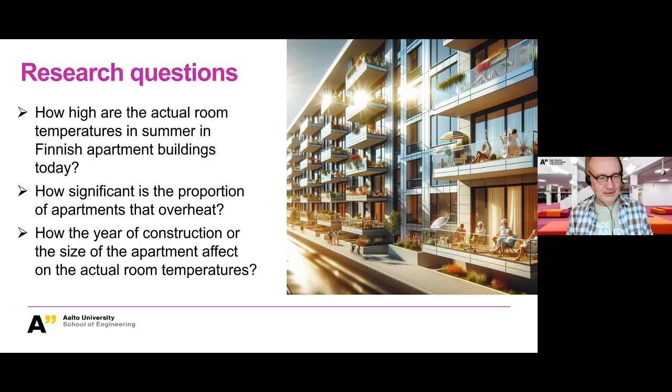This presentation focuses on three research questions. First, how high are the actual room temperatures in summer in Finnish apartment buildings? Second, how significant is the proportion of apartments that overheat? And third, how does the year of construction or the size of the apartment affect the actual room temperatures?

We have 4 climate zones in Finland, and this study focuses on the Helsinki region, which is located in climate zone 1. Here we can see all 4 climate zones, and now we are focusing on southern Finland. This map shows the average number of hot days during a 30 year period. In Finland, we define a hot day as a day on which the daily temperature exceeds 25 degrees. This map indicates that the average risk of overheating in buildings is highest in the studied climate zone 1.

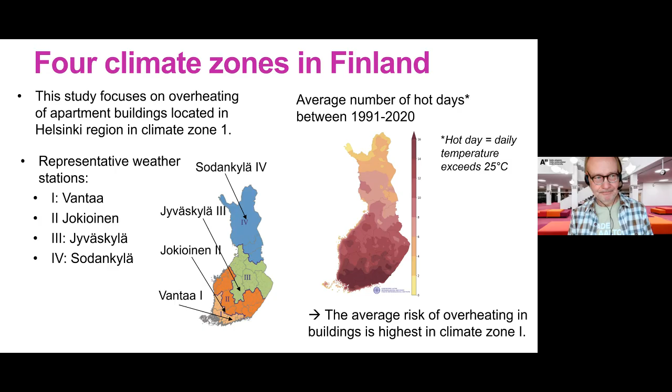As we all know, summers are getting warmer and long heat waves are becoming more common. This figure shows degree hours above 20 and 25 degrees during a 35 year period in the studied climate zone. We can clearly see there is an increasing trend in the degree hours, so summers have really become warmer.

In addition, long heat waves have become more common. Here we can see the top 5 list of longest heat waves in climate zone 1, and 4 of them have occurred during the last 15 years. In this presentation, I use the definition for a heat wave as a period of consecutive hot days.

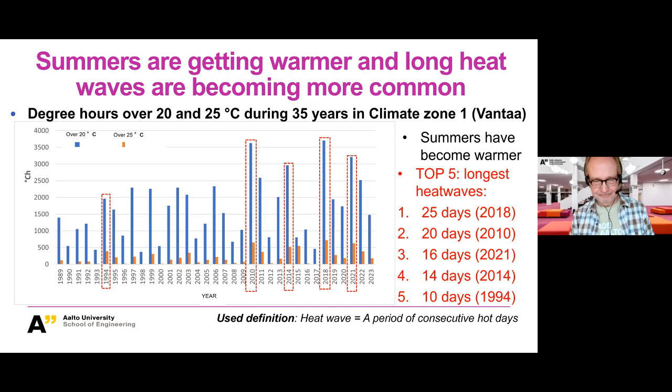We got access to extensive indoor temperature measurement data for apartment buildings, containing hourly indoor temperatures for several summers. In this presentation I used 2 summers: 2020, classified as a normal summer, with 16 hot days in total, and 2021, classified as a hot summer, with 30 hot days in total. It was third in the top 5 list we looked at before, with a 16 day long heat wave.

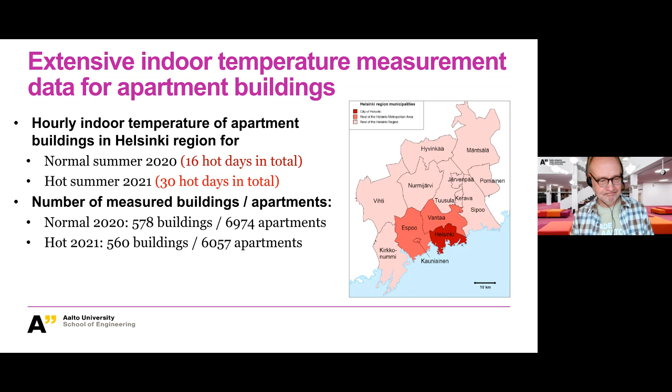This data contained over 500 buildings per summer and over 6,000 apartments. The construction year of the buildings and the floor area varied a lot in this data set.

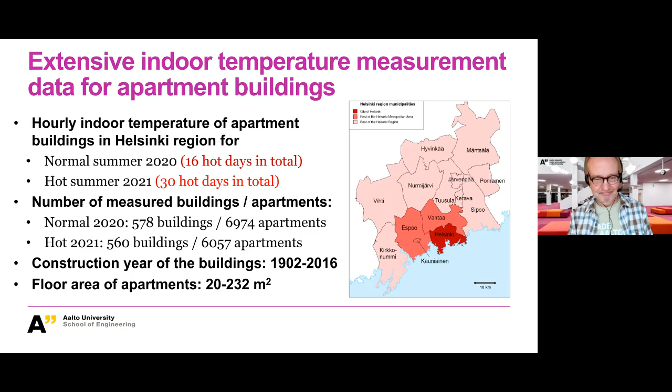The indoor temperature measurements were carried out in a way that one IoT sensor was installed in an entrance hall of each apartment, meaning the measured temperature describes the average temperature of the apartment. This also means there can be higher room temperatures in parts of the studied apartments, but we use the average temperature here.

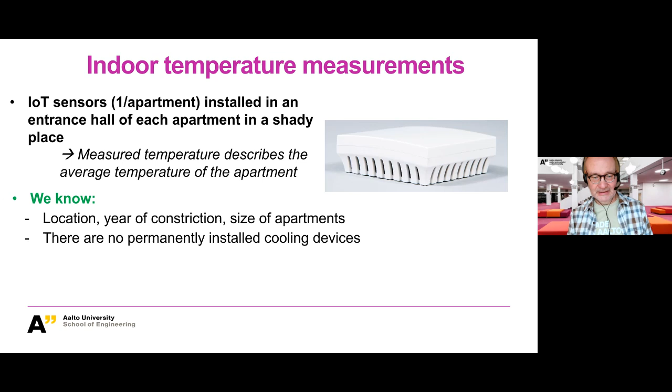About the dataset: we knew the location, year of construction, and size of the apartments, and there were no permanently installed cooling devices. But there were many things we didn't know, for example orientation, window areas, number of occupants, how occupants behave such as whether they open windows or not, and whether there are portable cooling devices.

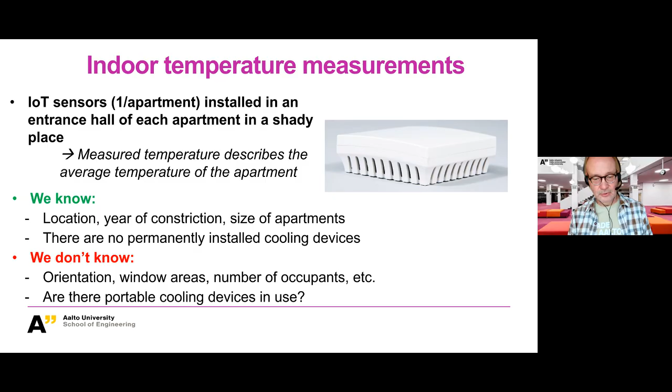We carried out grouping of the apartments by design year, classifying them into 5 design year groups. The first group was designed before the time of the Finnish building code, and in that group the ventilation system is either natural ventilation or mechanical exhaust.

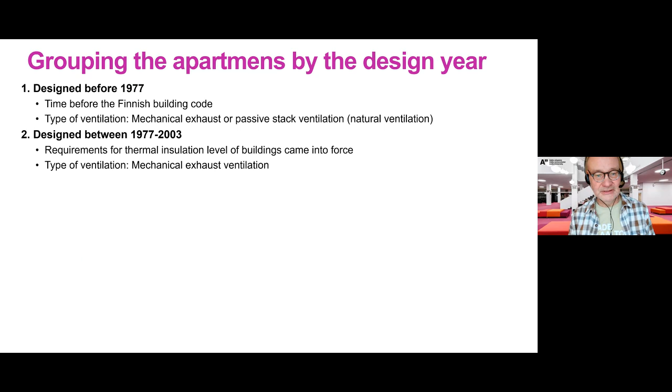In the second design group, there were requirements for the thermal insulation level of buildings in force, and in those buildings there is mechanical exhaust ventilation in use.

In the third group, there were tighter requirements for the U values of windows, meaning the use of low emissivity windows became a standard solution, so the solar shading of these windows was better than before. Also, requirements for ventilation heat recovery came into force, so the ventilation type was mechanical balanced ventilation with heat recovery.

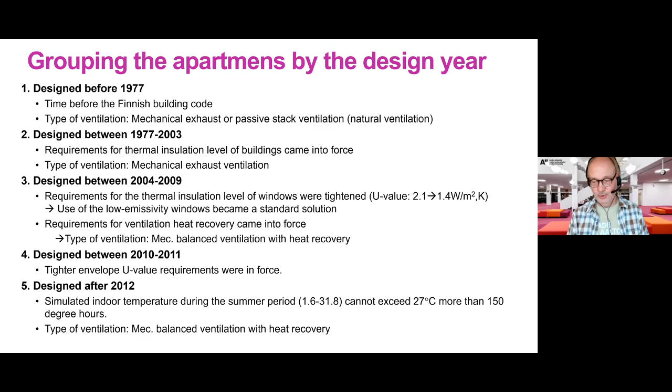In the fourth group, there were tighter U value requirements in force. In the fifth group, designed after 2012, there was a requirement for summertime indoor temperature at the design phase, stating that the simulated indoor temperature during the summer period cannot exceed 27 degrees for more than 150 degree hours.

Here we can see the number of apartments we analyzed by design year and size, after pre-processing and cleaning the data set. We can see that the most common design year groups are the first and second ones, and 2- and 3-room apartments are the most common in the dataset as well.

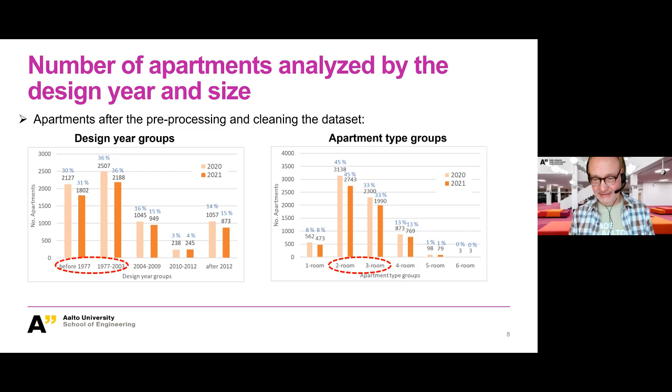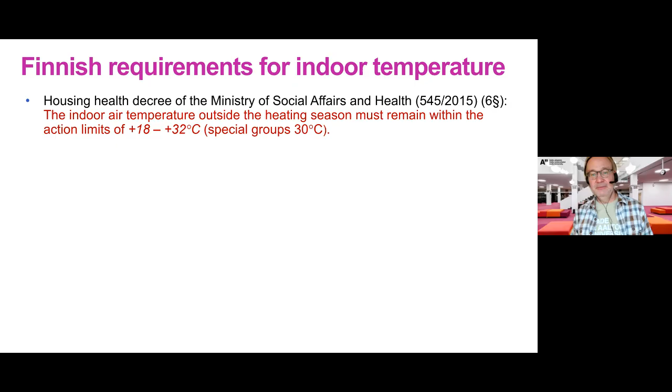Let's check briefly the Finnish requirements for indoor temperature. First, we have the housing health decree, which states that the indoor temperature outside the heating season can be a maximum of 32 degrees, defined as the maximum action limit. For special groups, this maximum action limit is 30 degrees, and special groups include, for example, elderly people in home care.

Then we have two decrees from the Ministry of Environment. The first states that the maximum design temperature of room temperature outside the heating season is 27 degrees. The second is the decree I mentioned before, which applies to buildings in the design phase and during the building permission process, before getting the building permission.

The simulated indoor temperature should fulfill the requirement that it should not exceed 27 degrees in the apartment building for more than 150 degree hours during summer months, simulated with fixed input data and the test reference year.

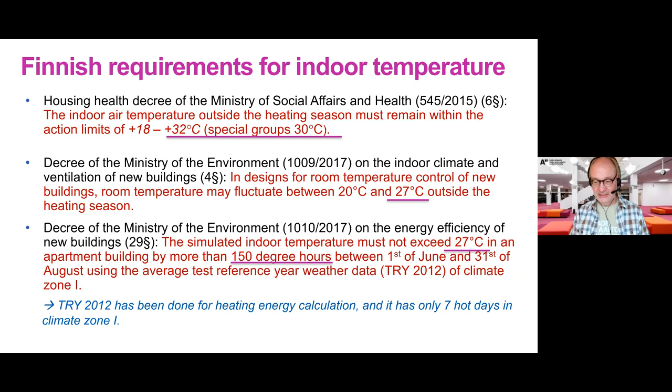This test reference year was developed for heating energy calculations and describes average weather conditions. It's not that suitable for this kind of overheating simulation because it has only 7 hot days in climate zone 1.

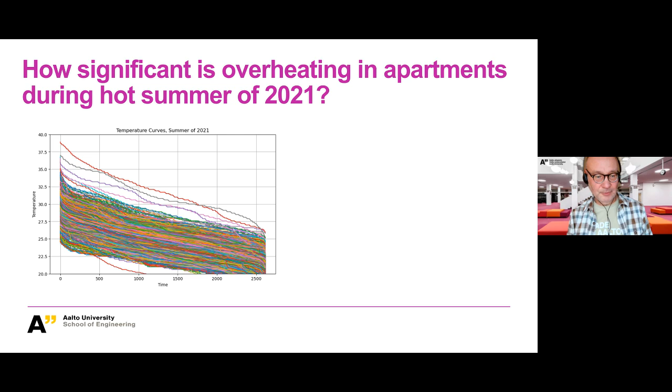Okay, then let's go to the results. Here we have a duration curve of indoor temperatures of all measured apartments during the hot summer of 2021, and we can see that the range of temperatures is really high.

From the action limit point of view in the housing health decree, we can see that the higher action limit of 32 degrees is exceeded in 4% of the apartments, and the lower action limit in 32% of the apartments. The design criteria of 27 degrees is exceeded in almost all the apartments.

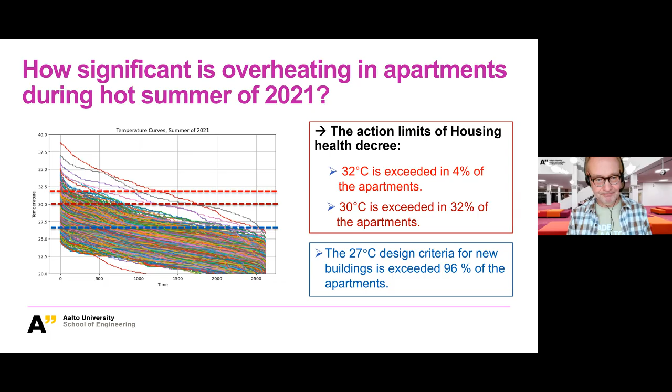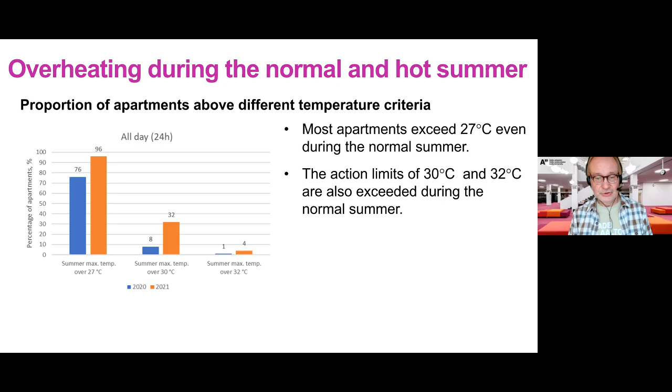Then how different is the overheating during the normal and hot summer? Here we can see the proportion of apartments above these chosen temperature criteria. Most apartments exceed 27 degrees even during the normal summer, and both action limits are also exceeded during the same normal summer.

If we apply these results to the whole apartment building stock of the Helsinki area, over 500,000 apartments, assuming they behave similarly to the measured apartments, then the higher action limit would be exceeded in almost 6,000 apartments in the normal summer and over 20,000 apartments in the hot summer. So even if the percentage of 1% and 4% sounds quite low, the number of apartments would be quite significant.

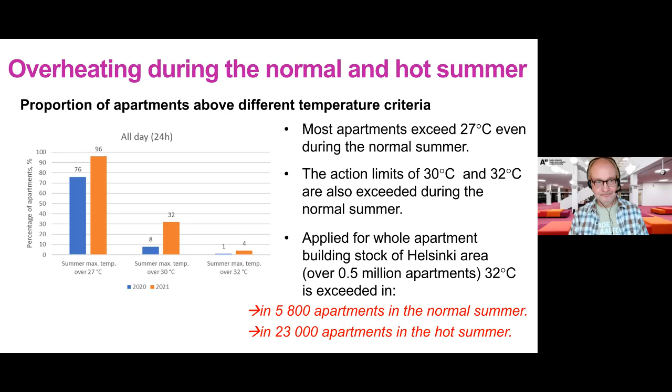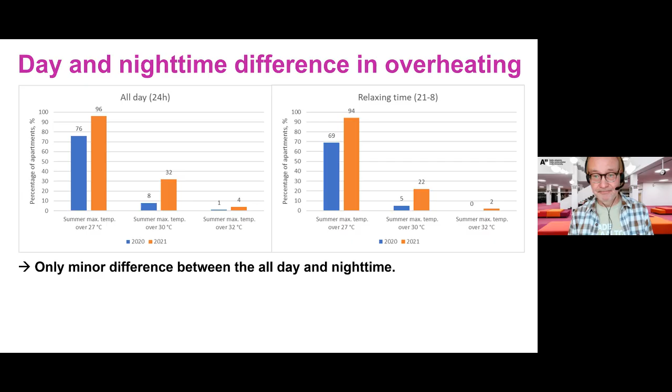Here we can see the day and night time difference in overheating, for all-day and relaxing time. These figures show that there is only a minor difference between all-day and night time. The load-bearing structures of these measured apartment buildings are brick or concrete, and if such apartment buildings warm up, they will stay warm even at night.

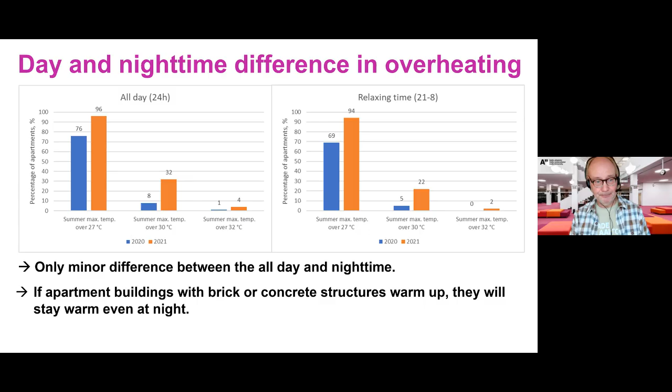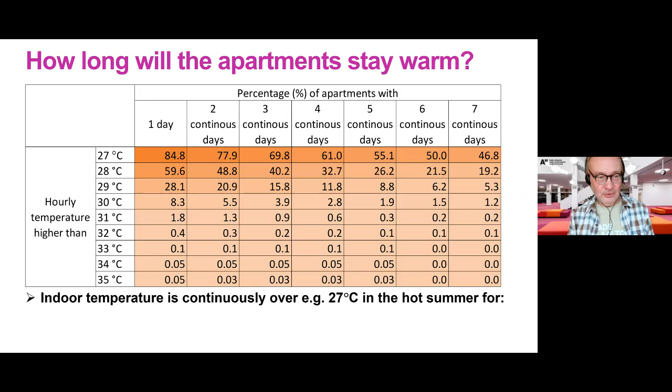Then how long will the apartments stay warm? This table shows the percentage of apartments which are continuously, from 1 to 7 days, over temperatures from 27 to 35 degrees. For example, if we look at 27 degrees, the result indicates that 85% of the apartments are continuously over 27 degrees for 1 day, or 47% of the apartments for 7 days.

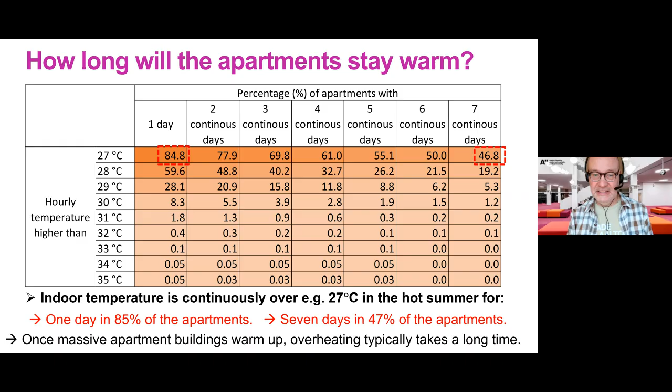This indicates that once the massive apartment buildings warm up, overheating takes a long time. We have also seen from the data that even if the heat wave is over, overheating continues for a long time afterward in such buildings.

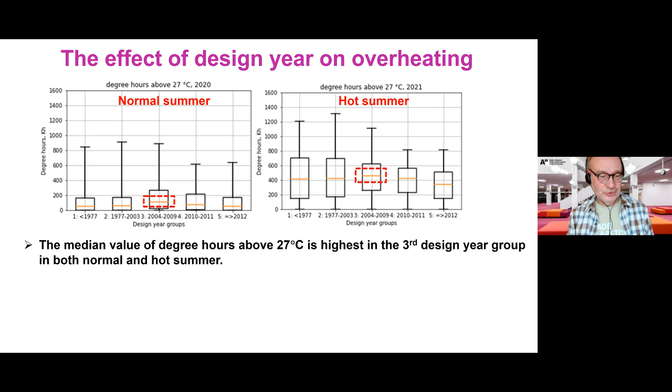Here we can see the effect of design year on overheating in the normal and hot summer. The result shows that the median value of degree hours above 27 degrees is highest in the third design year group in both summers.

This is quite an interesting result, because in those buildings the windows are better than before, and they have better solar shading than in the design year groups before them. But also ventilation heat recovery requirement came into force, so that may have a negative effect, for example if the ventilation heat recovery is not accidentally bypassed during the summer period. We don't know that, but it could happen.

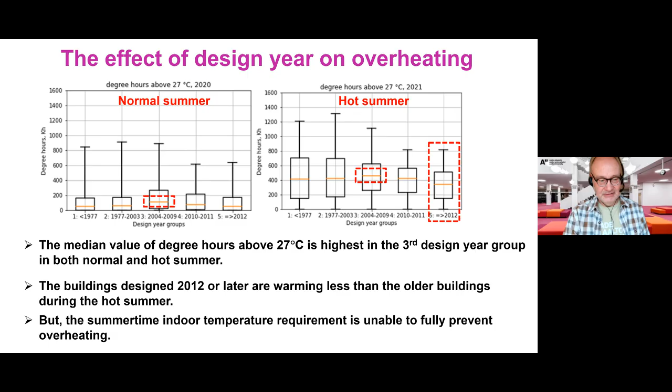Also, the result shows that the fifth design year group is warming less than the other buildings during the hot summer. So it indicates that this requirement of summertime indoor temperature is unable to fully prevent overheating, but it has a positive effect, so it reduces it slightly.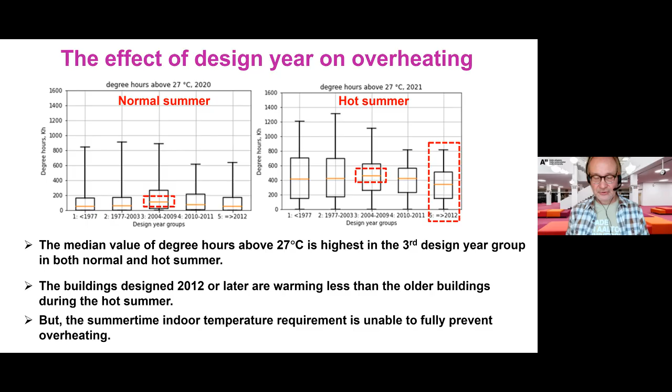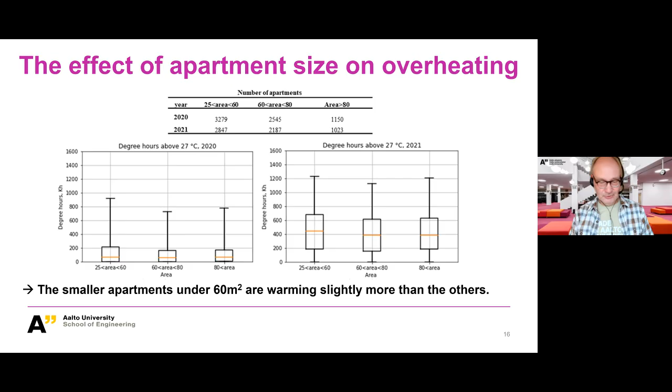Here we can see the effect of apartment size on overheating, with degree hours above 27 degrees in both summers. The floor areas are classified into 3 groups, and the results show that the smaller apartments are warming slightly more than the others. This is quite an expected result.

So this study showed that Finnish apartment buildings overheat significantly during the hot summer, but they also overheat during a normal summer. And once massive apartment buildings warm up, overheating typically takes a long time, with minor difference between day and night time.

The summertime indoor temperature requirements have succeeded in reducing overheating, but not yet enough. This means that stricter regulations are needed to prevent overheating in new buildings, and - which is more challenging - more attention should be paid to preventing overheating in existing buildings.

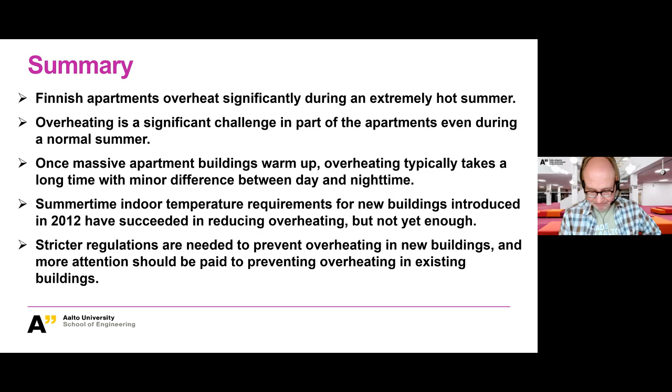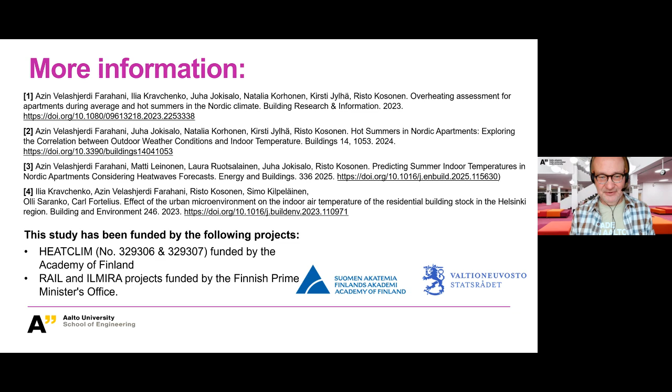If you are interested, there is more information in a couple of our papers, so details can be found there. Thank you very much.

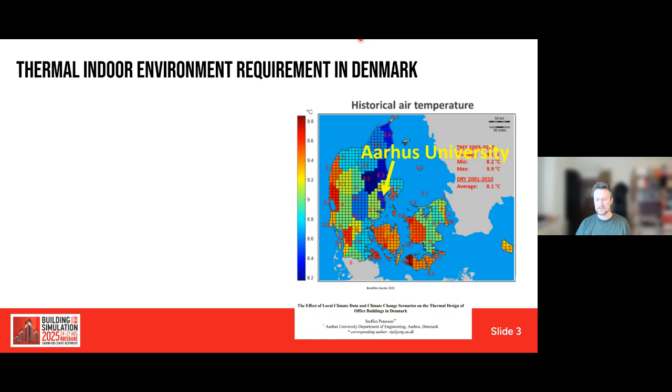But anyways, this is a talk about what's going on in Denmark when it comes to overheating of existing buildings, and the way that we design new buildings today. Because the thing is that we are designing buildings for the future, but we are designing them based on past weather. The way the code is in Denmark is that we have a requirement that says that in rooms where people stay for a longer period of time, it must be ensured that a thermal indoor climate that is satisfactory in terms of health and comfort can be maintained during the intended use and activity. And that is the paragraph.

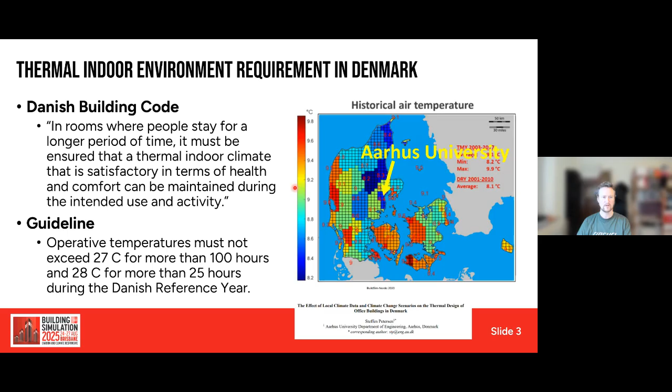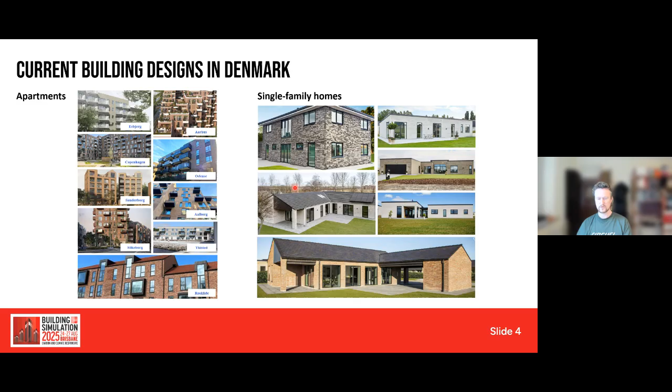The question is, in this talk and in this paper that we made for this conference, would these buildings also fulfill the code moving forward when we are projecting weather data into the future using different climate change scenarios? We're not completely sure what is going to happen, so we have to do scenarios.

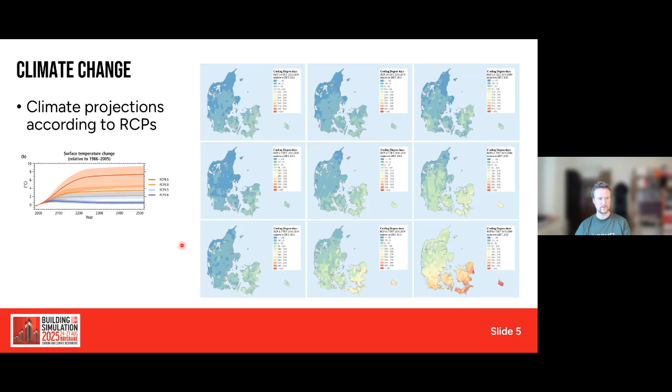So our question here was, are Danish dwellings built today resilient to the risk of overheating, assuming different climate change scenarios? The method that we used for this was to make some parametric models of a living room in a dwelling, and then use an algorithm to generate a lot of variations for these building designs. And then we developed this tool that we call ICEbear, a parametric, easy to use thermal calculation tool.

And then we simulate the performance of these 11,086 variations using sampling from this table you can see over here to the right. So we get different geometries, different combinations of heat capacity and heat conductivity, and so on. And then after that, we evaluated how many of these would pass this criteria of overheating I showed you earlier, with 100 hours above 27 and so on. And a total of 4,115 passed that.

And we could then condense that to 321 models that kind of represent the whole sample of these 4,115. So we get these designs that fulfill the criteria today using the weather data file that the building requirement says that we have to use.

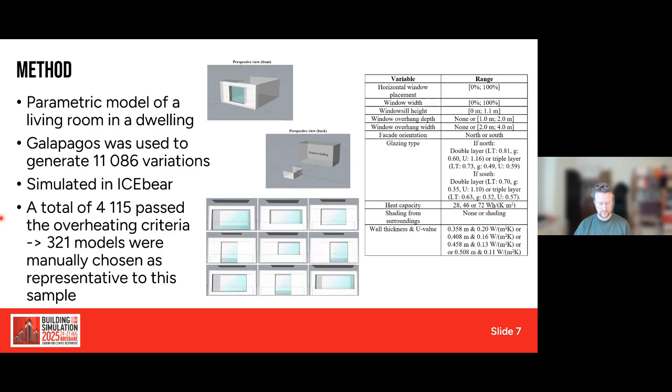Now the interesting thing would be to see if these buildings would still fulfill this overheating requirement when we use climate change scenarios. So we take these 321 models and put them into the 3 RCP scenarios I showed you earlier, and we do it for the different periods ahead in time. The question now becomes: how many of these models that are allowed to be built today, because they are not overheated according to the Danish building code, would still pass in the future?

Would they pass the guideline for overheating using other weather data?

For this purpose, we also chose a few geographically spread locations in Denmark. You can see this on this cooling degree map, Aarhus, where I am right now. We have the 5 largest cities in Denmark, which for some interesting reason are also situated in different degrees of increase of cooling degree days. So we have a geographical spread, and these cities are also the largest ones, so this is where it might impact the most people. We are simulating them for these different locations in Denmark to see if there's some spatial distribution of the problem.

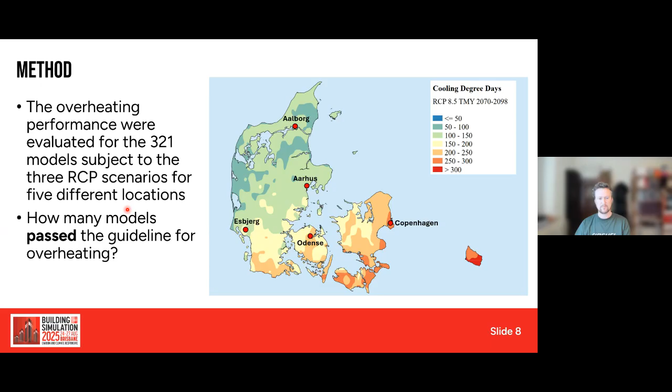So here are the overall results. I'm sorry, it's a lot of data in a table, so I'll block some of it out to make the development easier to understand. We have the different cities here, and we have the RCP scenarios. I'm just highlighting the 8.5 so we can see the development over time. These are the periods ahead in time.

You can see this, for example, for Copenhagen. If we look ahead in time, only 249 of the 321 designs fulfill the building code requirement looking into a near future. Looking further ahead in time, none of them will fulfill the code. They will be overheated according to the code.

If we go to a different location, Aarhus, where I am, looking a little bit ahead in time, all the designs will fulfill the code, and then in the future, some of them, but in the far future, none of them, and so on. You can see the development is slightly different across a small country like Denmark, where depending on how far we look ahead in time, these designs will not fulfill the requirement in the current building code.

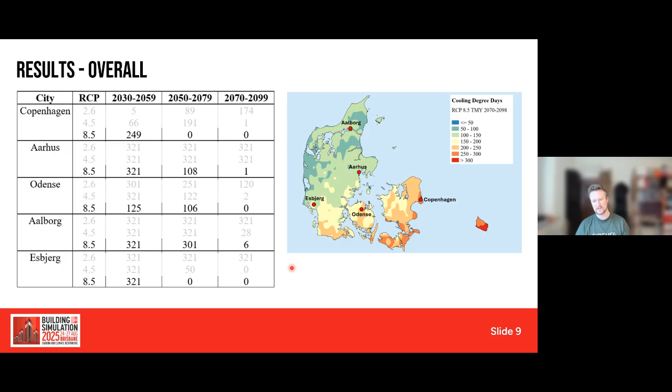So what can we do about that? What is actually important now to think about when we design our buildings moving forward? So we looked into the features of these simulations to look at those that are fulfilling the requirement. What are the traits? What are the design features of those?

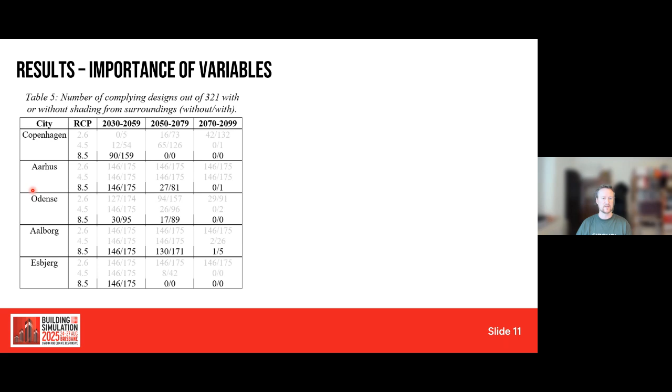Do you have, are you in an urban context or not, basically? Looking into this, it seems like if you have some shading from the surroundings on your buildings, they have a stronger resilience towards the overheating potential. Again, because the sun is also governing a lot of the indoor temperature in dwellings in Denmark and in the Nordic in general, I would say, we shouldn't underestimate the sun in this case as well. It's not only outdoor temperature.

Yes, orientation north-south. Again, there's a little bit of an interesting thing here depending on the location. Of course it's better to have it towards north, but it's still possible to have south as well, unless, of course, we look far into the future, then something else might happen.

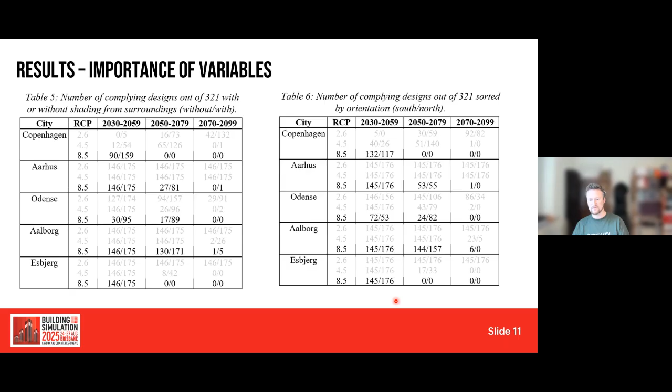Let me check: 2 or 3 layer glazing. That's always a discussion in Denmark—should we have 2 or 3 layer glazing in our buildings? It's a trade-off between heat loss and heat gains. The 3 layer glazings reduce heat loss, but they also reduce heat gains because of the G value, and it's vice versa with the 2 layer glazings. So what's the nice balance in a Danish context?

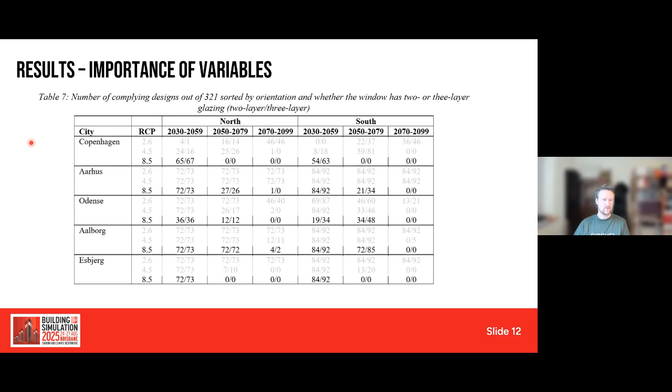Looking at 2 layer versus 3 layer glazing, depending on whether it's facing north or south, we can see some statistics showing that it depends—it's not clear whether it should be 3 layer or 2 layer. It very much depends, which is interesting, and opens up further investigation into what would be the appropriate design choice for glazings when we also take daylight into consideration.

But there are some options, some ways that could help in terms of thinking about how we avoid overheating in our buildings for the future.

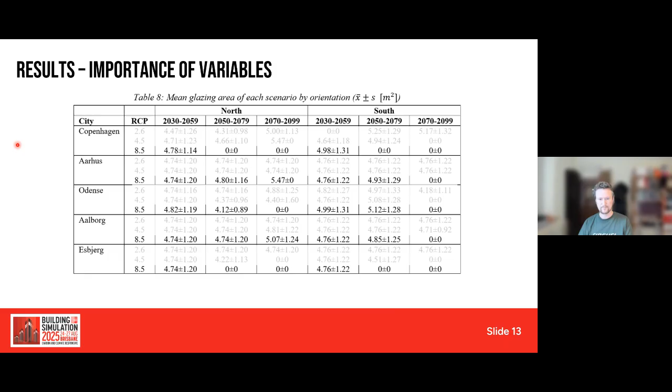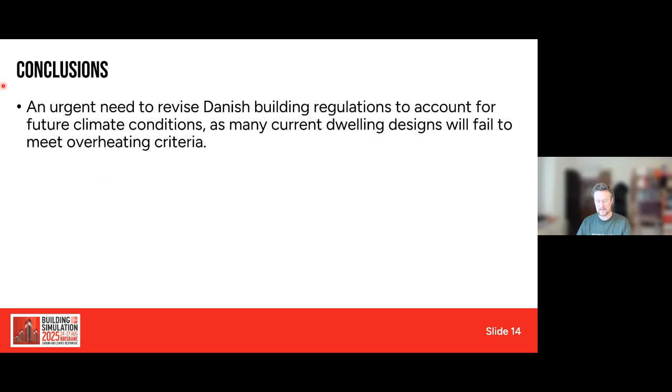Our conclusion from this study is that there's an urgent need to revise the Danish building code regulations to account for future climate conditions, as many current dwellings designed will fail to meet overheating criteria in the future. That's definitely our notion based on this analysis.

We also see that thermal mass, window overhangs, and shading from surroundings can mitigate the issue—so there's a bit of advice for building designers here. Building codes should be updated to encourage climate adaptive design strategies and passive cooling measures. They don't at the moment, but maybe we should guide a little more.

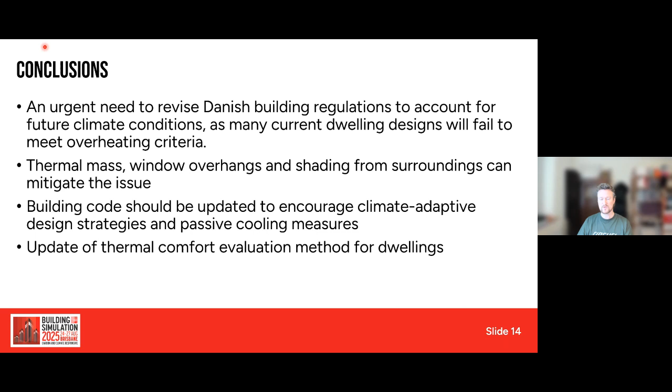We also need an update of the thermal comfort evaluation method for dwellings. I don't think counting hours above a certain threshold is an appropriate metric for dealing with overheating. There are other metrics that I think are more appropriate, so we should look into that too.

The final thing is just a little commercial for a draft paper we're working on. You can see our nice Nordic region—sorry Iceland couldn't be on this map. We've done this recently and are trying to publish it now; you can find it online already. This is the development of cooling degree days and heating degree days across the Nordic region.

We can zoom in on this map and see what's happening in a grid of 12 by 12 kilometers when it comes to heating degree days. We're also looking into the length of the heating and cooling seasons, how long they are, how much they change, and where they change. So there's data here relevant not only for us Danes, but maybe also for our dear neighbors in the Nordic countries.

So thank you very much for your attention—that's all I had for you.

Okay, thank you Steffen. I think—okay wait, there's one question here. Maybe I can ask it now: is the passive cooling methods enough to handle the future climate, or do we still need to think about mechanical cooling?

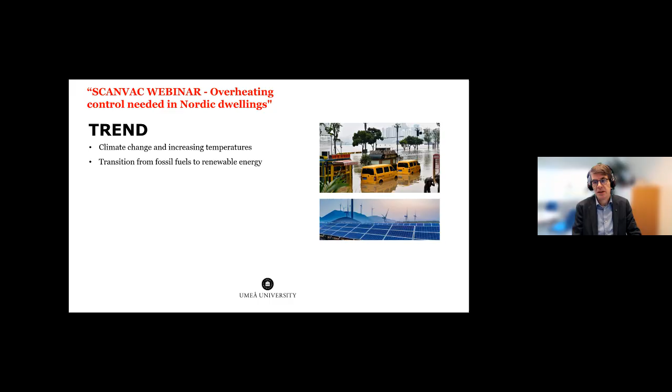There is a transition going on from fossil fuels to renewable energy, and that is influencing the production, distribution and use of energy. The industry sector is influenced, and also, of course, the transportation sector and the building and service sector. Everything is happening at the same time, and we are all influenced by each other.

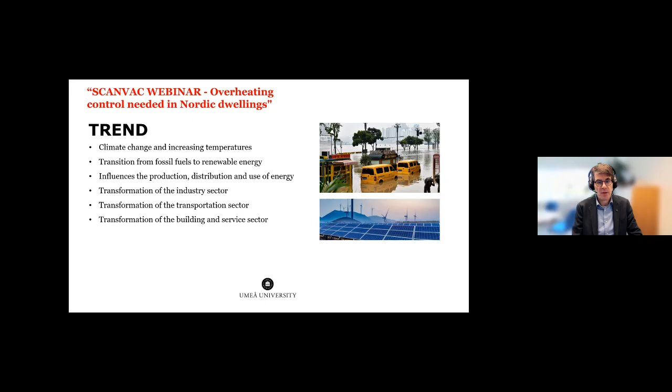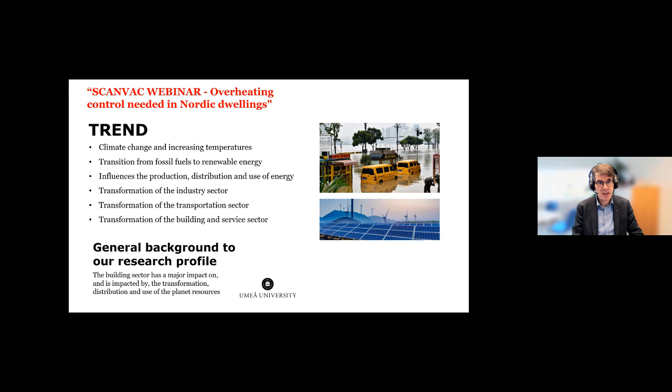So the profile of the research we are doing is that the building sector has a major impact on this transformation, and on the use of the planet's resources, but we also have to adapt to these changes, and that is also the topic for today.

It was interesting, in the previous presentation we have seen a lot of maps, and if you look to the left here, we can see that the increase of temperature is going rather fast.

These are data from 2014, and we can see we are located in the north of Scandinavia, near the sea, in the Baltic Sea, and we can see that we can have a lot of effect of this increased temperature.

We can also see on the right map, similar to the data we saw from Aarhus, or from Denmark, that here we can see how the length of the heat periods or heat waves are increasing from now, based on future climate scenarios.

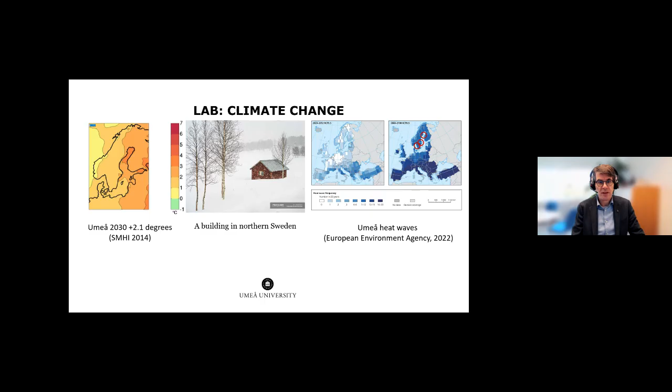How will we meet these future climate changes, and how will we adapt both the use of buildings but also the built environment? That is a little what we are studying, and I will present. The background is a little about how we should investigate and study this.

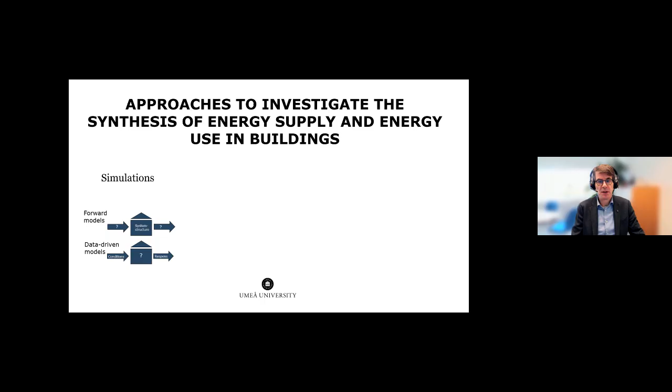We can do a lot of simulations, of course. They are very powerful simulations to study these effects of climate on adaptation and how we should construct buildings in the future. We can also work a lot with surveys and interviews.

That is very useful. There are a lot of live-in labs happening now where we can do this kind of studies, including users and different kinds of technical innovations.

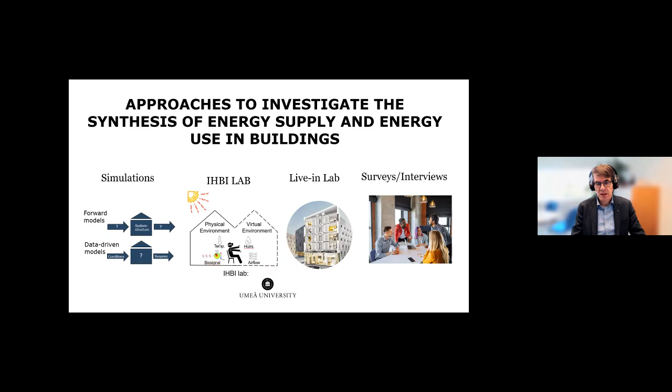What we are doing is another approach. We have what we call an Intelligent Human Building Interaction Lab to get other kinds of data and other opportunities.

What we can say about this lab is that the key thing about it is that it's a physical environment and also a virtual environment at the same time. There are people sitting in the lab who can experience the physical feelings of different scenarios, but they can also be experiencing different virtual scenarios at the same time.

I can show that later. Then we can study climate change, and from that we can study how people adapt to different climate change scenarios, physiological effects, psychological effects, and also building upgrades based on this.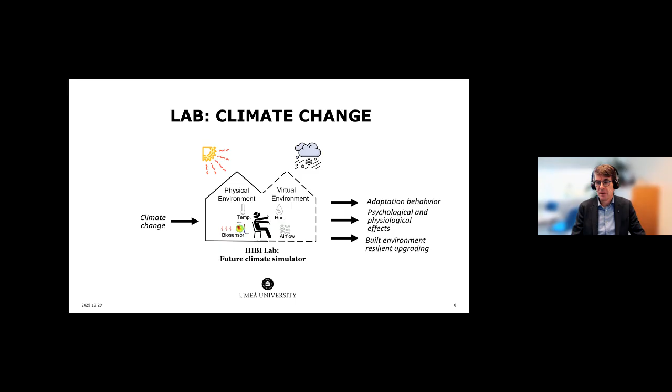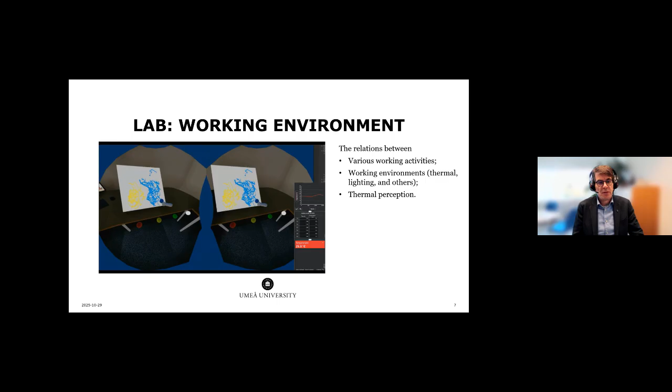I can show you one example here. We have a film here, and in this film, that is an example of how we are working in the lab. We have one person sitting in the lab and doing some physical work.

In this lab, the person can also experience and report how, if it's hot and cold, warm and cold, they can write down their experience, but they can also change different kinds of conditions, for example heating, cooling, and so on.

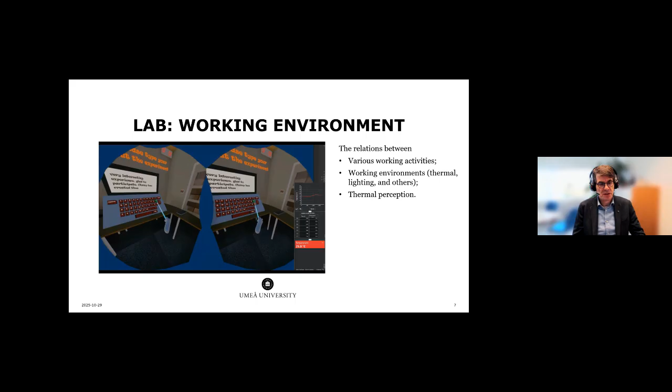With this lab, we can now investigate building stock, different building stock conditions, and how this building stock will both influence and be influenced by how the users in this building stock behave, and how that behavior is influenced by different technologies. We can study that also in different climate scenarios, going from a more problematic future scenario to a more green scenario. That is what we try to say with this one.

Now I will come to my first study to illustrate some of the findings of what we have been doing. This first study is from Umeå, where we study two nearby areas. Area A has more multifamily buildings, a lower income area, older buildings. Area B has single family buildings, with a different kind of users and a different quality of buildings. We study how the climate resilience differs for these different areas.

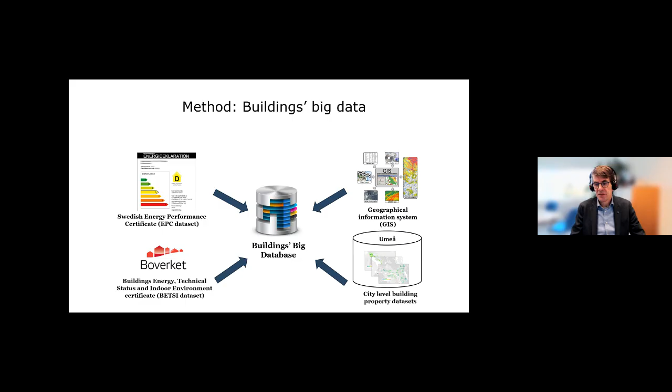To do that, we collect a lot of data. We collect data that the government has gathered in different surveys, and also from the databases of the Swedish Building Energy and Technical Environment certificates. We have GIS data, but we also have data, shown in the lower right corner, based on previous research where we have collected and merged different databases together.

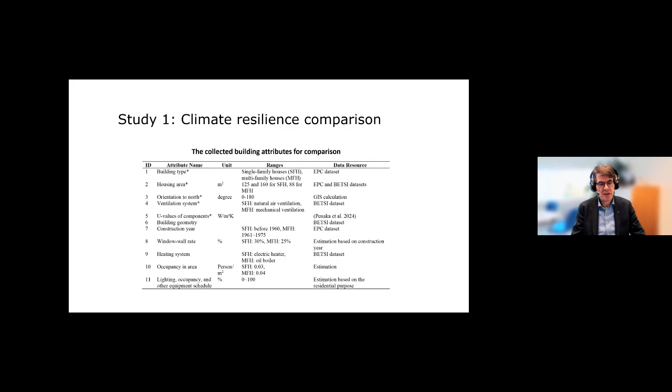This gives us more property and building data information. Based on this data, we can have different attributes of these buildings in the district: building type, housing area, orientation, ventilation system, U-values, geometry, window-to-wall ratio, heating system, occupancy, and light, and so on. That is one part of it.

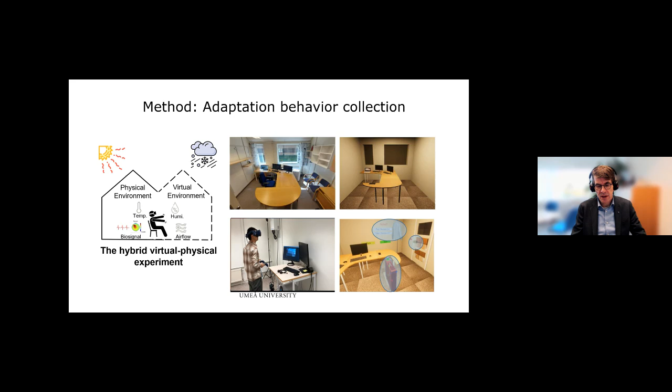The other part is that we can also collect behavior data from our lab. This is a lab where a person can stand and virtually experience different kinds of building technologies and environments, also receiving the physical experience, as I showed in the short film, and can report their experience and how they would act. What we are doing in our model is merging this building big data

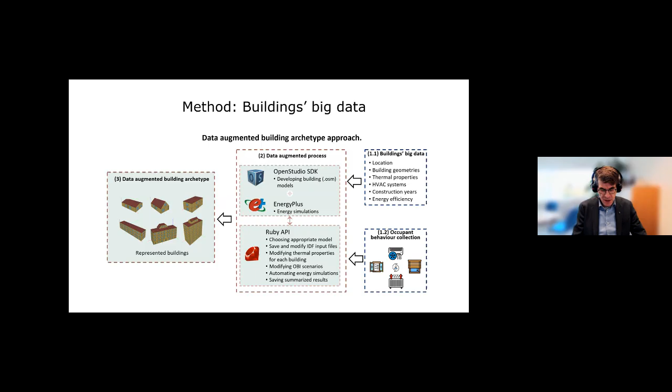in the upper right corner together with this occupant behavior collection from the lab. We then merge that into what we call a data-augmented model, where, based on simulations, we can combine this behavior data with the building technical data to produce these data-augmented archetypes. I can show you an example of what that looks like.

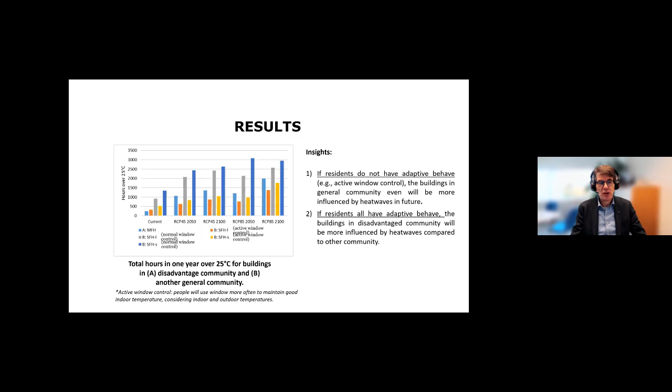However, what is rather interesting in this study is that perhaps the buildings facing the biggest challenges in the future, based on this district, are actually the single family buildings, which will be rather affected. This may relate to window overhangs and how these buildings are constructed, similar to the Danish example we saw, which could be one example among many. Perhaps the problematic buildings in the future, at least in this district, could be the single family buildings, but active window control can somewhat reduce the number of overheating hours.

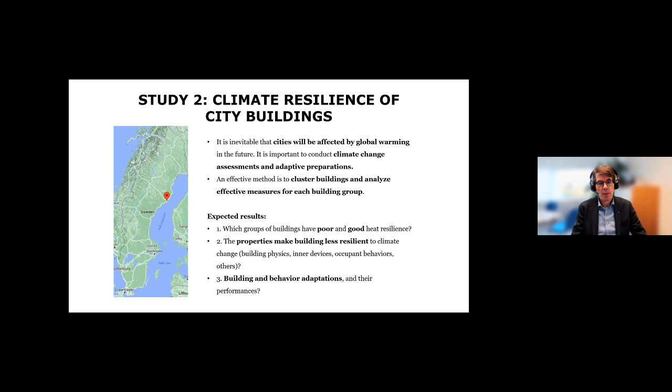Another study we conducted is more on a city level, based on this data and method, showing that cities will be very much affected by global warming in the future. The interesting question is where the vulnerable buildings are in the area, and what properties are related to vulnerable buildings when we think about future overheating, so we can understand strategies better.

In this analysis, we have used the big data we have on buildings, the behavior model we have, and also the big data multivariate simulation model. What we can see on the right here is that we have studied different parameters.

We can study operative temperature and predicted percentage of dissatisfaction for different simulated buildings. Based on a limit where we think it's a problematic situation, we can identify buildings experiencing this problem as vulnerable, grouped as red, versus black when they are not. We can also study the related parameters for vulnerable versus non-vulnerable buildings using a multivariate study called PRIM.

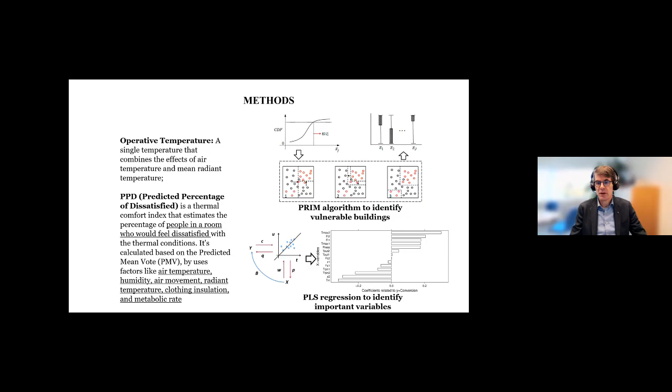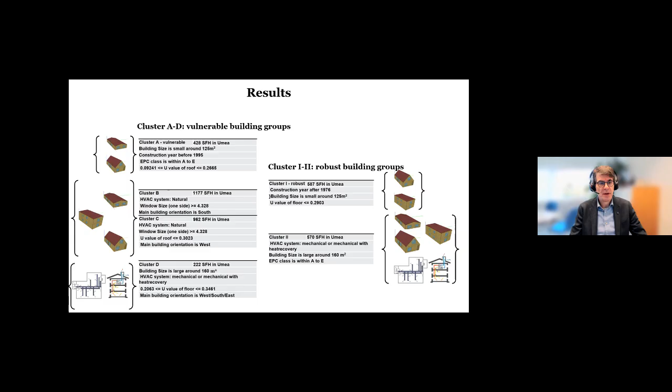From this modeling, we can cluster buildings, and we've done that for our city. We have different clusters of vulnerable buildings and clusters of what we call robust buildings that are less vulnerable to climate change, based on the number of overheating hours. For these clusters, we can also learn which parameters relate to how they cluster and what characterizes them. I can show you on the map how this looks for our city, Umeå, where we've done this study, with clusters spread geographically across the city.

The first cluster, shown in blue, represents the vulnerable single family buildings in the region. The orange cluster represents the robust buildings in the city, based on the data in our database and this multivariate modeling. We can also run simulations with these buildings.

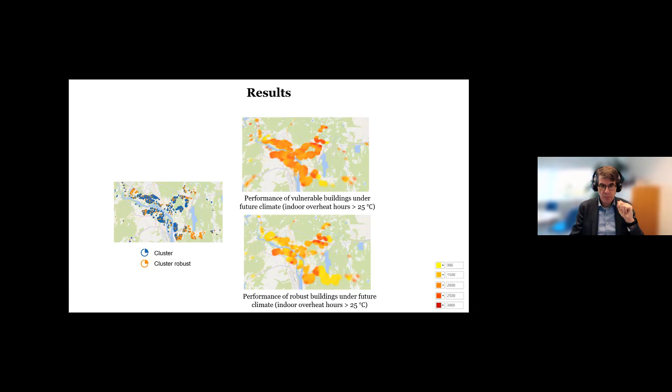We can study the performance of buildings under different future climate scenarios, using this dataset to see how many overheating hours the vulnerable buildings will have in a future hot scenario compared to the robust buildings. Looking at the top chart, yellow represents 900 overheating hours and dark red represents 3000 overheating hours. We can see the vulnerable buildings show much more problematic behavior during the same scenario studies than the robust buildings shown at the bottom.

We are also studying different kinds of adaptation solutions for this data. For example, applying an adaptation solution to all vulnerable buildings or all robust buildings, we can see how that influences the number of overheating hours in this dataset, and we can also visualize that geographically on the map.

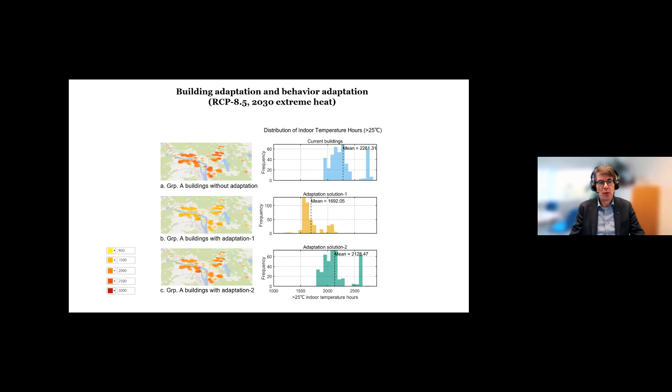For the future, we're also interested in using our lab more directly. We are developing different scenarios for our lab, studying combinations of different air temperatures, heating, humidity, and air velocity climates in the occupied zone.

In our lab we can have people experience these different scenarios, and we study how the person reacts and how they interact with the building's technology—whether they take off a jacket, open a window, and what else they do.

The interesting thing about these studies is we can put people in the lab with different backgrounds, ages, genders, and so on, and study how they act in future climate scenarios under different option scenarios—like whether they open windows or not—and how they define their experience in terms of feeling hot, cold, satisfied, or dissatisfied in that climate.

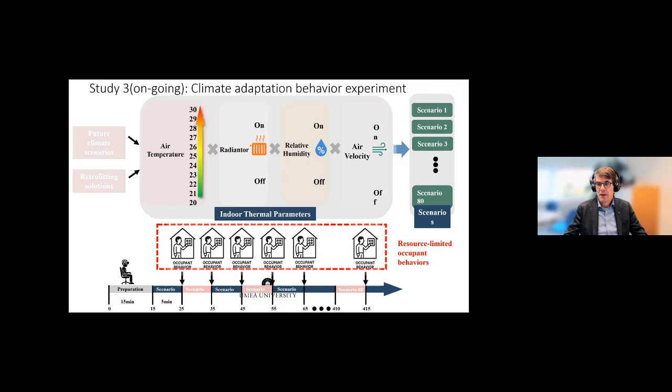That's also what we're working on now, trying to integrate these results into the big data studies to learn more about how future buildings can or will behave when occupied under future climate scenarios. That is how we are working in Umeå with this.